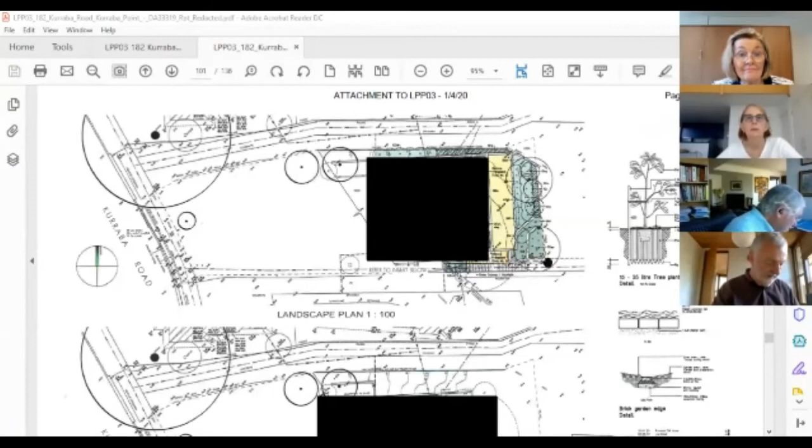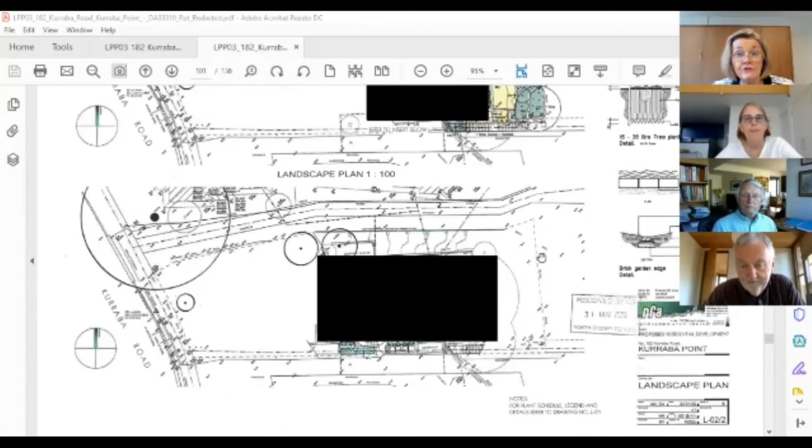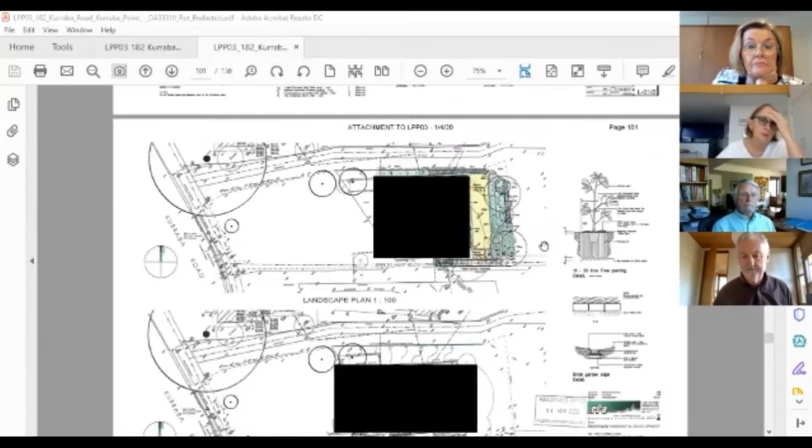Excuse me. Yes, we've got those plans on the screen now. Are they the ones you're referring to? Let me just check that, please. They look similar. Yeah, that one. I'm sorry. Yes, they are. They are? That's right, yeah, they're the ones.

Okay, that's good that we've identified them because they form part of the record. Thank you. Again, looking at the top plan on page 100, it seemed to me the redaction had blotted out a lot of what might have been vegetation. So I think that's correct, actually. So we were left wondering whether we're going to have mulberry bushes or oak trees. Neither, I hope.

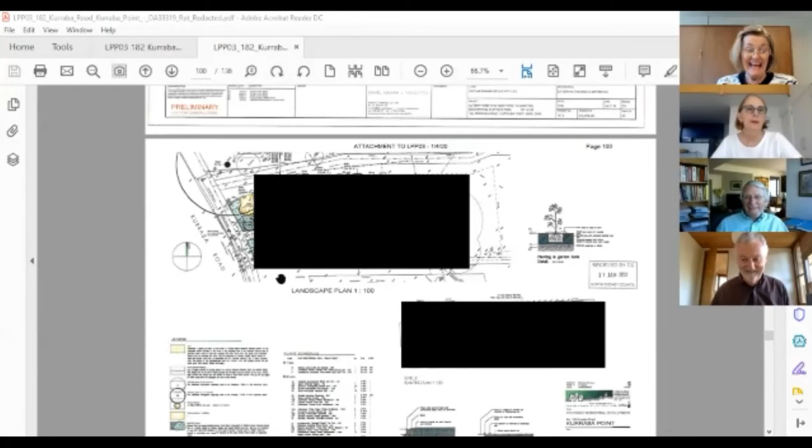So we will certainly look at that very carefully. Can I just ask a question? When you showed us the relationship between your property and the proposal, what level in the proposal relates to what you were showing?

So if I go to the attachments, page 84, proposed lower ground floor plan upper, is that the one that would be what we were looking at, i.e. the one under the extension of the building that exists now? What page number was that again? Yeah, I think 84. We'll just get 84 up.

So it's the proposed lower ground floor plan. I just wanted to clarify if that's the relationship between your floor and that floor. That I think would be ground level, so that means ground level would be our ground level, but our house is lower. So that would be sitting, well, hang on, let me just turn this. Lower ground floor plan upper, that's what the plan's, yeah. I think because the lower ground floor lower is the excavation part, so the upper is what would have been sitting on the current level. And so what we're looking at there, I think you're right, is the lower ground floor upper.

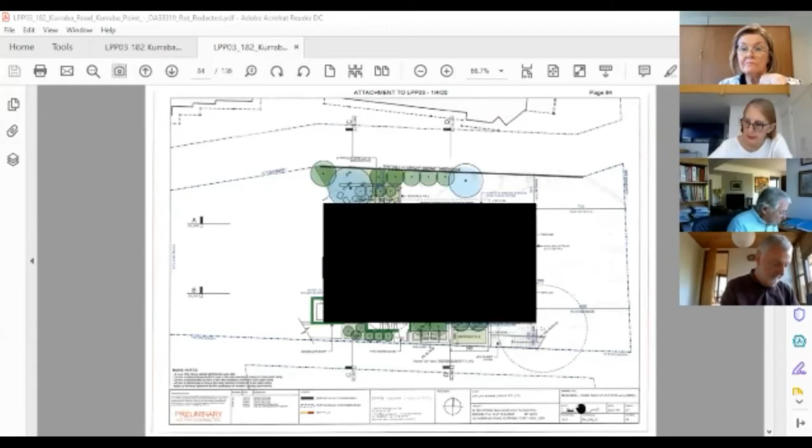So is it the bulk of it, or the privacy issues resulting from it, from the balcony? Look, primarily the privacy. We're not in favour of big, but it may be the order of the day, given high density and all of that. But ultimately, it's the privacy issue for us because, with more units, more families and closer windows to us, it's the privacy, I think, essentially.

And would it be appropriate screening? I'm sorry, could you repeat that please? Would that be addressed by some form of appropriate screening in addition to the landscaping? Well, look, it may well do. We wait and see. It could be, it may well do.

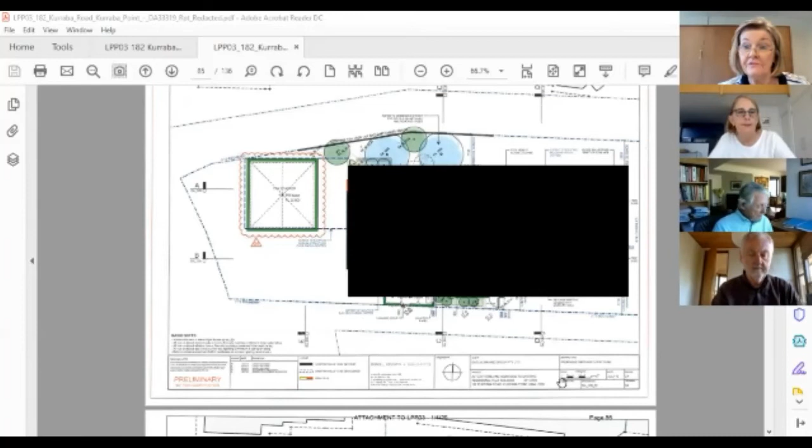All right, thank you very much. And as I said, we will be making a decision later and it'll be available hopefully by the end of the week. We do thank you for persevering with our problems here. Well, thanks for hearing me out. We're trying to make sure this is as transparent as possible and in accordance with all the legislation. I understand. Thank you so much. Thank you, bye-bye.

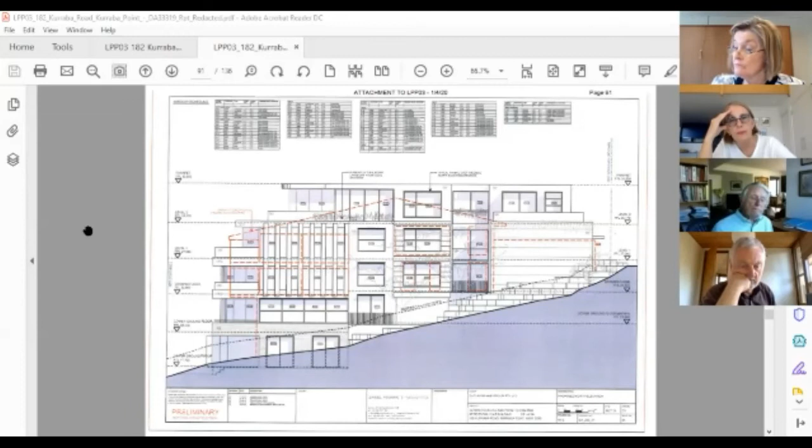Well, the lily pillies are 3 metres, so they're going to be at least 1.5 metres above the fence line. So they're probably going to improve the lower ground privacy issues. Yeah, the lower ground lower, which has got a fence in between it as well, which is below the level of the objector's property. It'll be more an issue of the objector being able to look into that lower level than a concern for them. If you look at the existing building at ground and level 1, you'll find that most of those windows already exist on that side.

So we're not actually changing the status quo. Well, we're not necessarily about whether you're changing the status quo. We're about assessing a development for major changes to a building.

I think there's also proposed obscure glazing to about 1.5 for those windows. Yeah, that's right. Plus there's also some louvers there as well. Are they fixed louvers? Yeah, they would be fixed louvers. There's no louvers, as I understand it, on the lower ground floor upper.

So would you be content to have some louvers there? I don't believe that it's an issue there because it's too far down. You're looking at his fence basically from the fence. So we're talking about lower ground floor upper, which the adjoining owner showed us in the video is almost a level relationship with his property.

So that's where you're going to have a balcony, as I understand it. The balcony's on the far east side, and we're happy to have some screening there because we don't want to have a privacy issue on our balconies either. So I'm happy to have some screening on that balcony edge. On the north side, yeah.

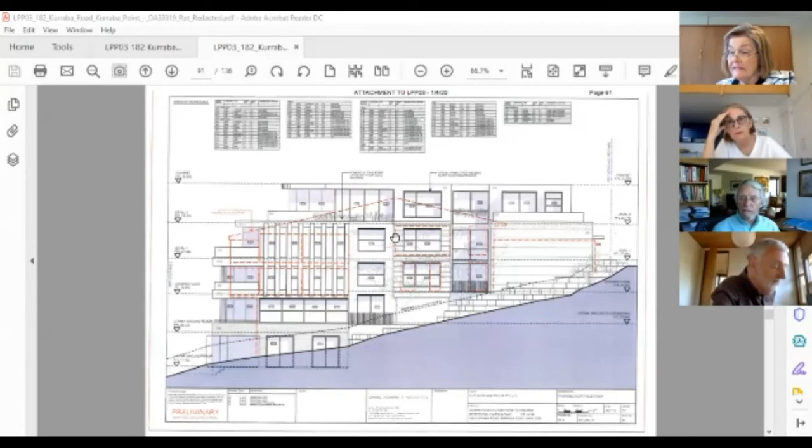Yes. Mr. Rami, is there anything further you wish to address the panel on? I think that the DA conditions have really addressed most of those issues that have been raised by the neighbours. Yeah, that's right. Okay, that's it.

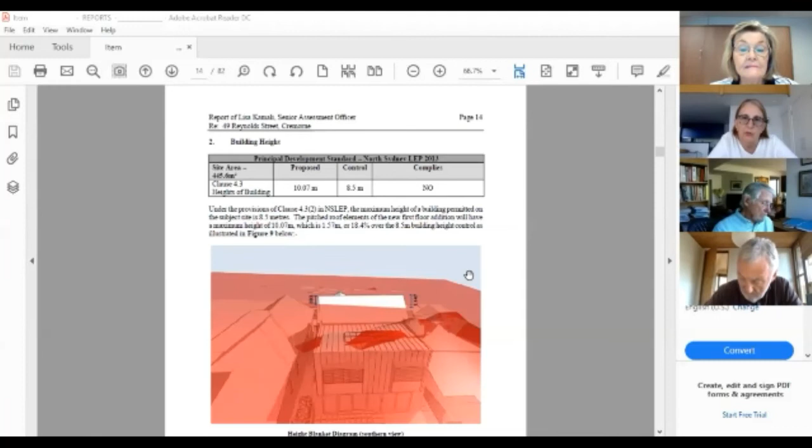So what we have in front of us at the moment is an assessment that recommends to the panel that you don't determine it in its current form because clause 4.6 isn't satisfied. Technically, if we agree with that assessment, we can't actually approve it and impose deferred commencement conditions. All we can do is either refuse it in its current form...

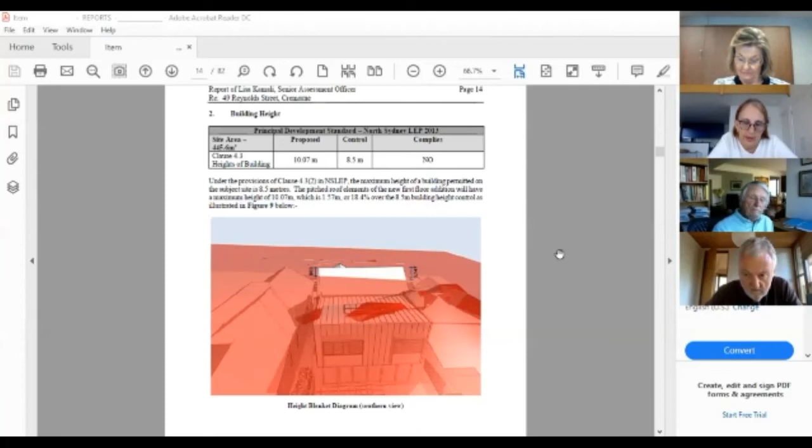...in which case you would come back with an 8.2 application request, as Jan's outlined, or you can request a deferment, go away and look at how you can better comply with the height control to reduce the bulk of that roof element.

The box element to the rear does comply with the height control. I recognise what your architect has said, that if you bring it in from the side, you're going to have problems getting the accommodation you're needing. So that's something the panel probably needs to discuss, what our opinion is about the bulk and scale of the box element at the rear.

So, yeah, Jan, you might want to. Yeah, so just to, that's exactly right, Annalise, and we're really saying that the report in front of us makes it very difficult for us to approve even what's there in that deferred commencement, because of the complications or technicality of the 4.6 height variation.

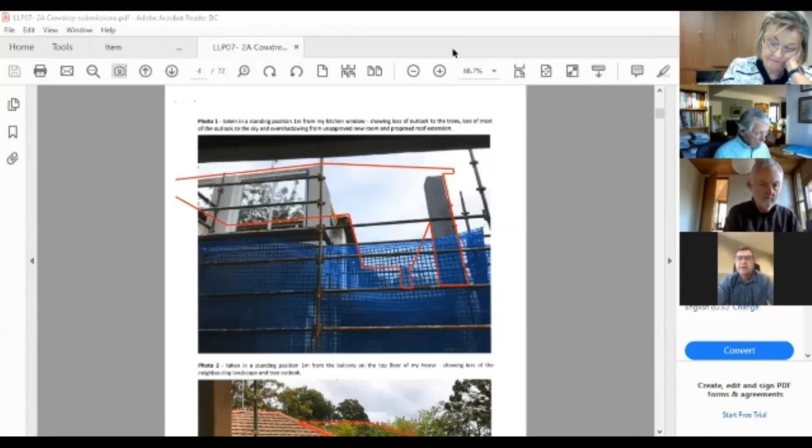I think the most important thing in terms of the tenacity test that we would like to submit is the suggestion that a more skillful design could provide the applicant with the same development potential and amenity and reduce the impact on the neighbours' views.

And we believe the alternative design that we've suggested in the submission achieves that objective.

If the roof extension were confined to the central and western half of the deck—in other words, if the existing L shape of the deck was retained and the roof deck extended in that existing L shape on the western half—our view would still be impacted, but not significantly.

Furthermore, there'd be no loss of amenity for the applicant because the main water view is to the north of the dwelling, and the eastern side of the deck merely looks straight into our kitchen.

In summary, the proposed roof addition and extension along 8 metres of the eastern side of the top floor, from where there are minimal water views, serves no practical purpose for the applicant, but has the most adverse impact on our property. Importantly, the compromise we've suggested in respect of the design would also fully address our concerns regarding the solar impact.

The report focuses only on the kitchen, from where the photo was taken, where there are still views and solar access to the north.

However, this is not the case for the two bedrooms on the level immediately below our kitchen. Here the solar impact is significant, and one of the bedrooms has no northern facing window—the affected western facing window is the only source of light for this room.

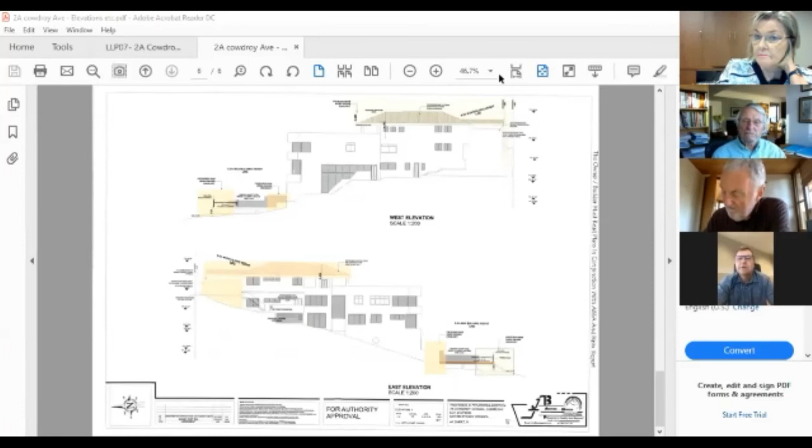The report only mentions the impact on our third, southern bedroom, but this is the least affected area. As noted above, the loss of light to our western facing bedroom would mean it would not receive the required 3 hours of sunlight, which it does at present.

Can I just say that the reason it may not have been in the report is that the solar access requirement is not for bedrooms, it's for living rooms in terms of maintaining solar access.

Continue on, sorry. Thank you for that clarification.

Point 4 is finally, concerns the unauthorised solid masonry walls which have been constructed on the top deck. If the unauthorised windows on the eastern top deck are to be removed, as proposed by the applicant, it is only sensible to also remove the solid unauthorised walls as they are no longer necessary.

In summary, the alternative design we have suggested in our submission does not affect the amenity of the applicant, but would address all of our issues concerning views and solar access. We support all of the other recommendations in the report, and thank you again for the opportunity to address the panel. I'll just ask the panel members if they have any questions.

Annalise? Sorry, can we hear Annalise, please? Yep, she's on mute. We're just getting her up. No questions. Oh, thank you.

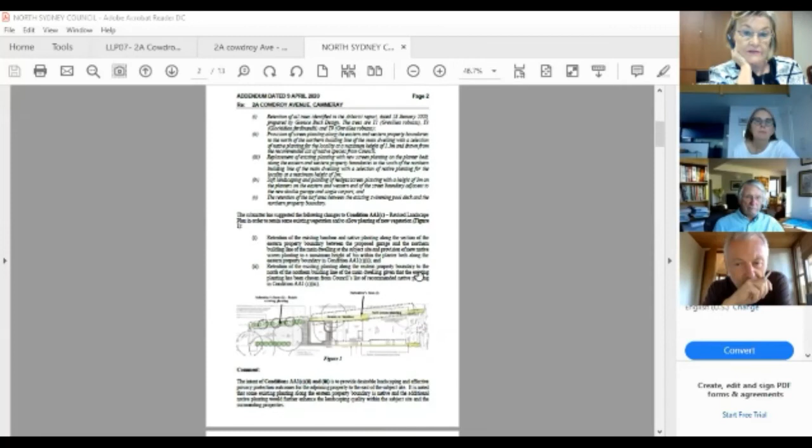I should have asked you that in the beginning, whether you'd read that. Could you now look at that document? Sure, how, I'm on my mobile, so. Right, yes, is it accessible via website? Yes, on the North Sydney website, it's accessible, the North Sydney Local Planning Panel. I'll try and access that now. Thank you. Okay, then, and then we'll come back to you. Thank you very much. And we're sending you the link in chat.

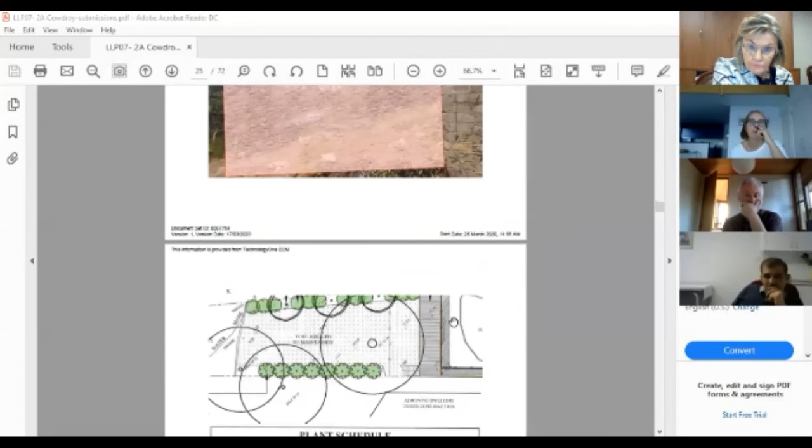But Robin's report says the deck should be completely deleted entirely, which I fully support. So Robin's report says to delete the proposed swimming pool deck, which I support. Okay, thank you very much.